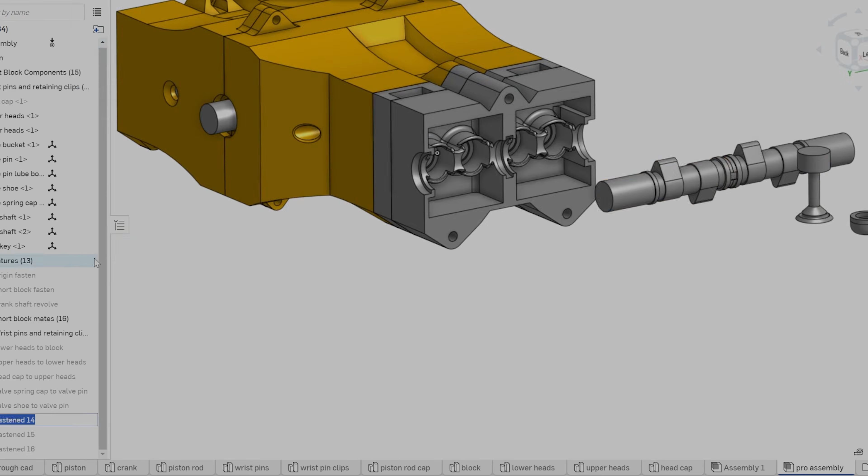Recently, I've been working on a 3D printed boxer engine. I designed it from the ground up in Onshape, taking inspiration from the famous Subaru boxer engine. This isn't a replica model by any means, it isn't a scaled version of an EJ or an FA engine, it's just how I went about making a boxer engine.

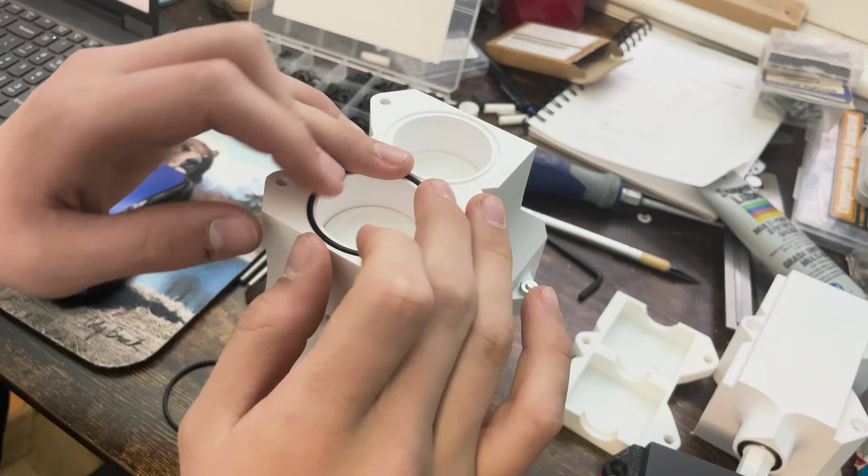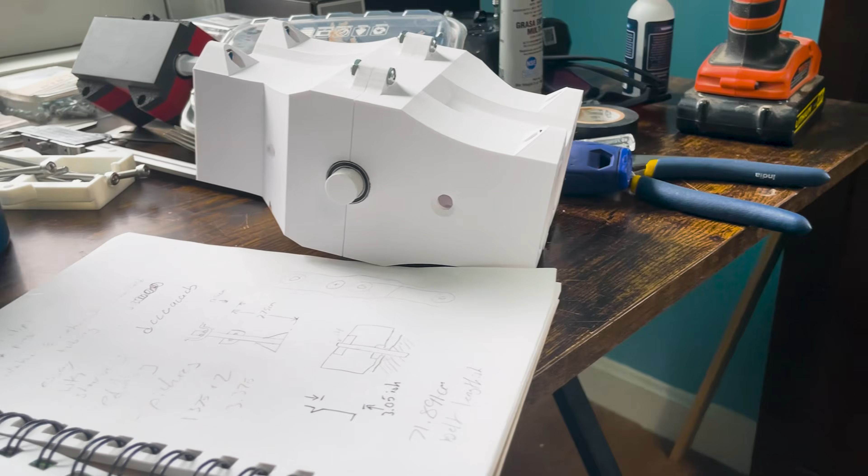My goals for this project are pretty optimistic. I want to try to make it run on compressed air. There are a whole lot of reasons why that's going to be insanely hard, which I'll get into. This is going to be the first of 2 videos I make on this engine, with this one being a lot about how I went about designing it and the assembly process.

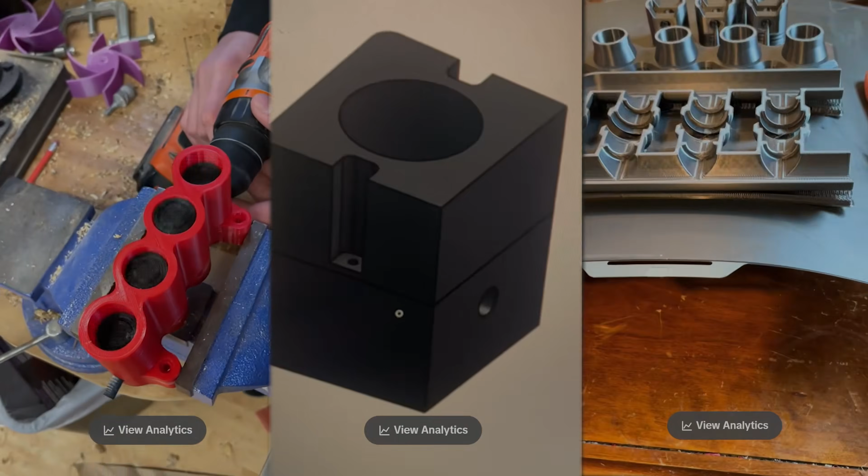I've attempted to make a bunch of engines in the past, a few inline 4s, some 1-cylinders, and a bunch of turbines if you count those. Since the last time I made one of these, my understanding of CAD has developed, and this was one of my motives for attempting this project. The other being that I just like cars and motors and stuff.

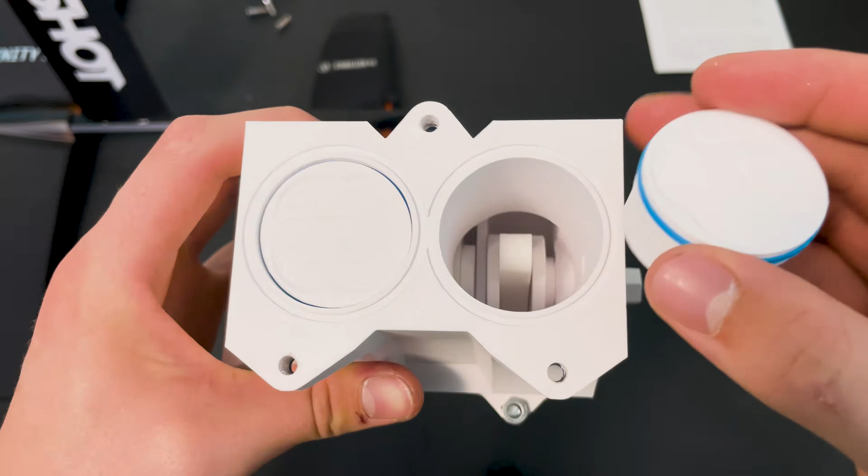Back to the challenges with making a 3D printed compressed air engine. First off is sealing. 3D printed parts are only so precise, and they themselves, due to the layers that they're manufactured in, are not at all airtight. So tolerances are going to have to be very precise and well designed surrounding the piston rings, the valves, and any other areas that experience pressure from the intake.

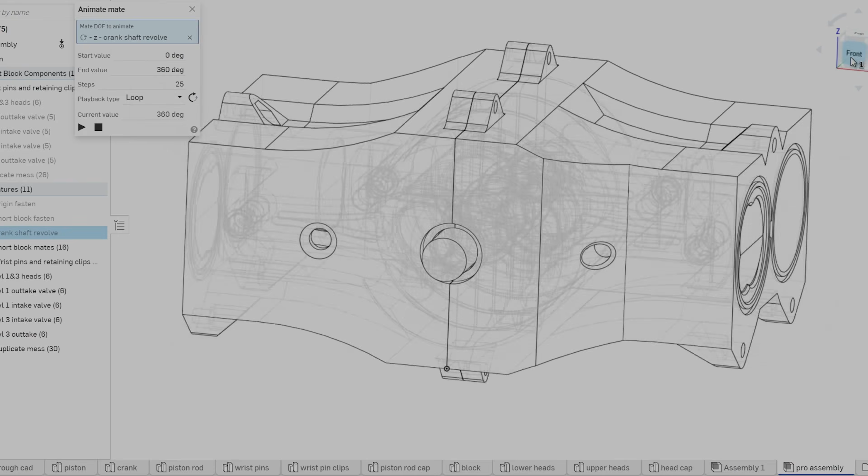Problem 2, because 3D printed parts are drastically more imprecise as they get smaller, for the sake of components like the valves and cams, I had to make the engine relatively large. The short block alone from side to side is 18 centimeters, and with the heads added to both sides, it's 30 centimeters. That said, it is not small.

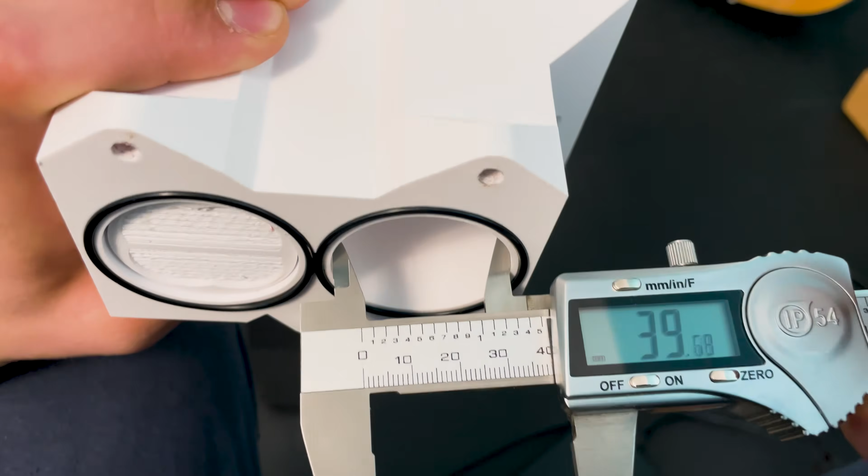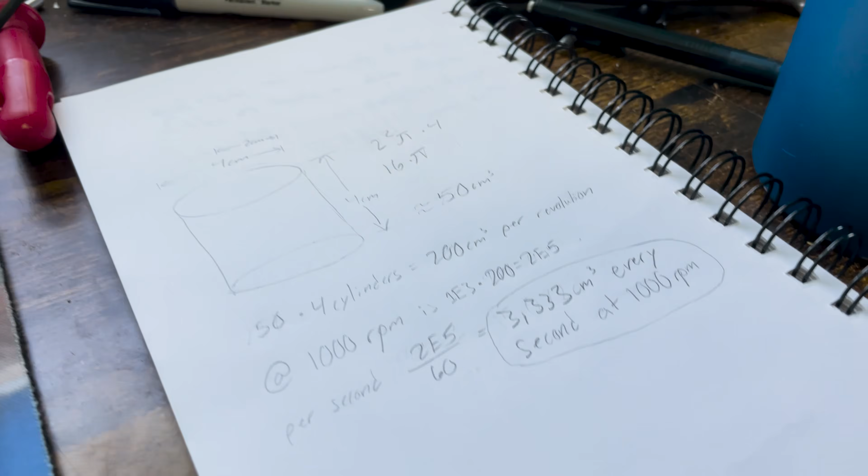This means that the displacement of the piston, and consequently the volume of pressurized air required for each stroke, is pretty significant too. I designed the stroke to be proportional to the diameter of the piston head, meaning that the piston is 4 centimeters across, and the distance the piston travels from top dead center to bottom dead center is also 4 centimeters. All this to say that our intake source not only needs to make pressure, but also shove a big quantity of air into this thing.

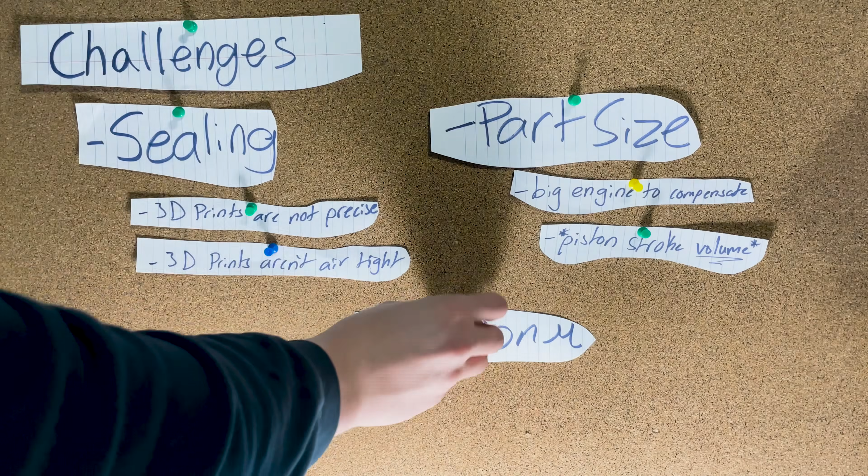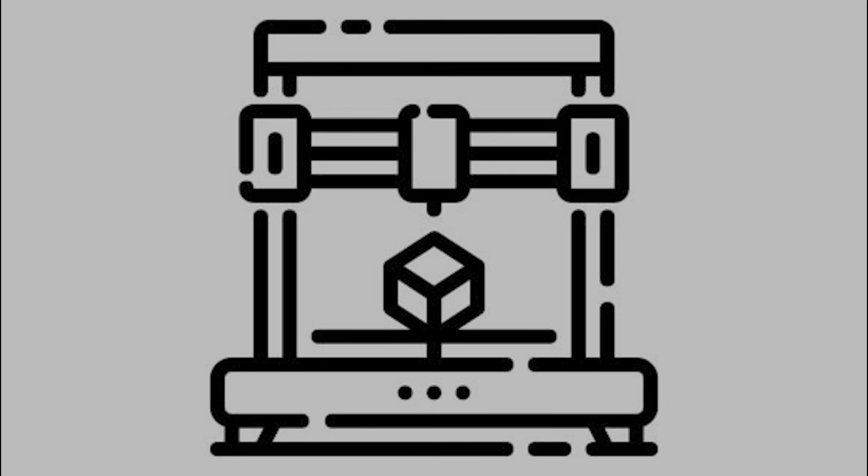Issue number 3, plastic is not metal. Plastic rubs, makes heat, fuses together, seizes up, very malleable and prone to warping or cracking, the list goes on. Well, then why don't you just use metal? Well, first of all, I don't have money. Second of all, I don't have a CNC. I have a printer, so I've convinced myself that this is part of the challenge, okay? There are a fair few other issues, but these are the big ones. Anyways, all that said, I'll start by explaining how this project began.

I started out with a cube in Onshape, just trying to figure out the rough dimensions of this engine before I started crafting up the main file. After Lord knows how many hours working on the short block, we've got this.

Surrounding the 4 centimeter cylinders on top of the block, there's space for some large O-rings to help with that sealing issue where it mates to the heads.

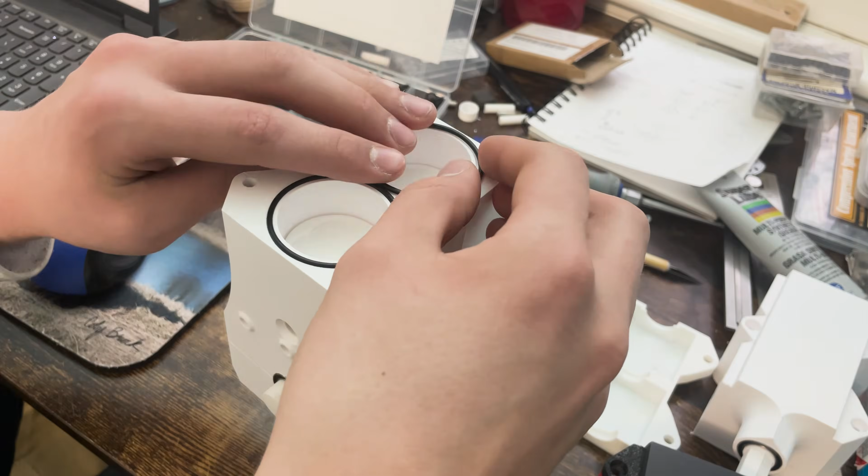I landed on using some chunky M5 bolts with nylon lock nuts to hold the heads to the block, which attaches here. To hold the two halves of the short block together, there are these tabs for some bolts.

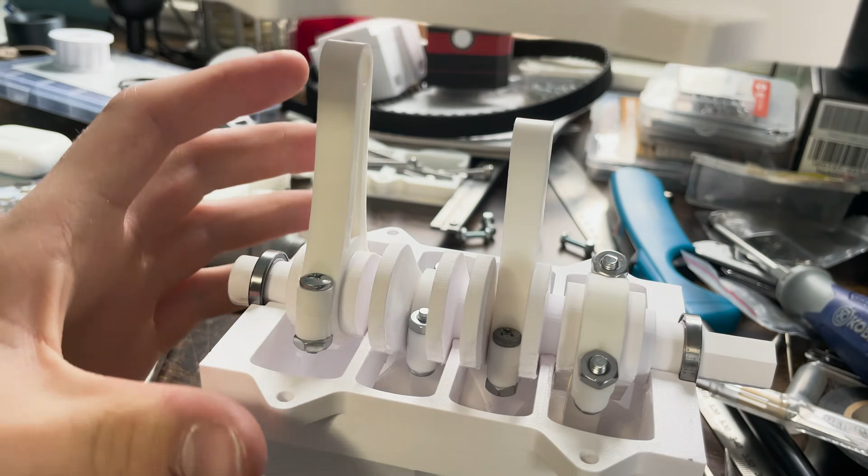The crankshaft sits in the middle, of course, and I made space for some massive 21mm bearings that I stole off of the RC car.

There are these supporting structures here with a slight indent, except for the very edge, to minimize the surface area rubbing against the crankshaft.

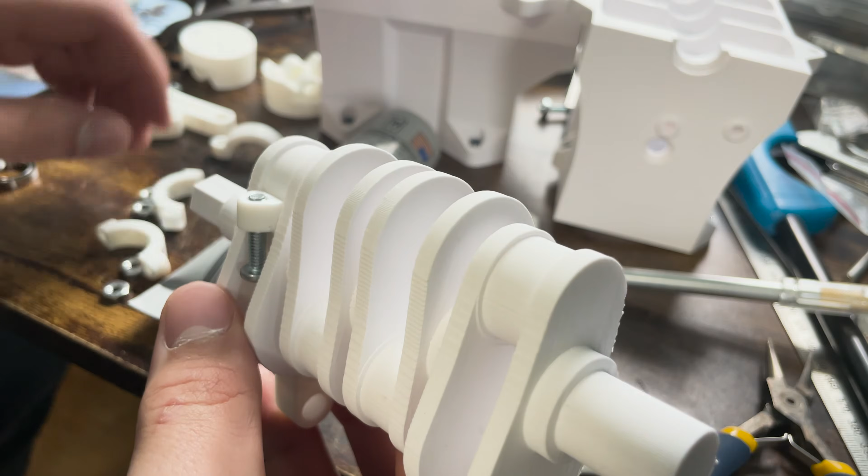Moving to the crank quickly, similarly I put little indents on the counterweights to minimize the surface area of the rubbing parts, and here is a hexagonal keyed shaft on the end for the timing belt.

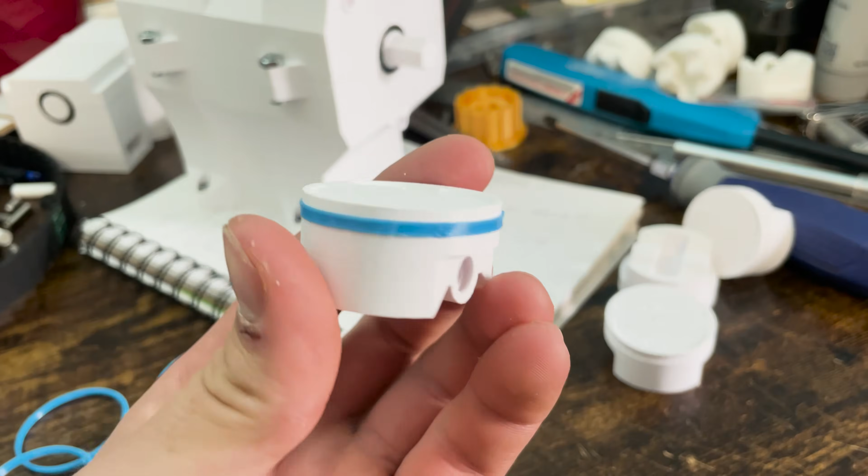The piston is also pretty simple. There's space for a piston ring, a wrist pin, and a retaining clip, and I put these fancy little extrusions on top like you see on F1 pistons. In reality, they do nothing, and in fact they just aggravate me when I have to take the supports off, but they look cool, so whatever.

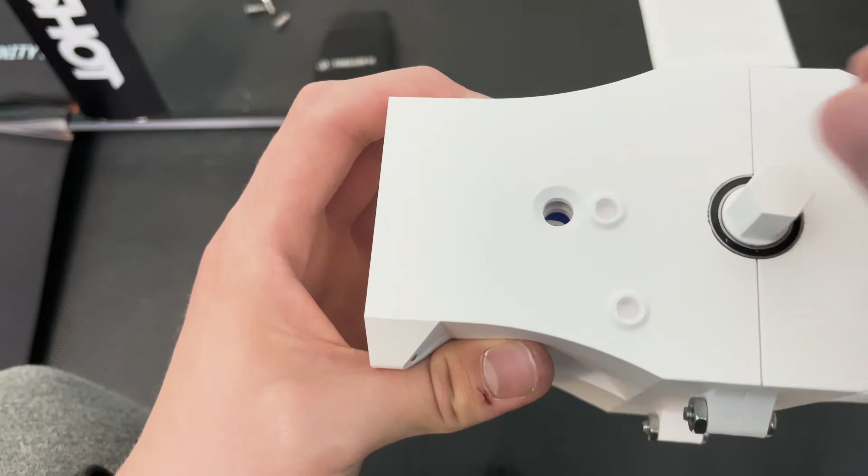I had no reason to factor this into the design since they're hidden inside the engine anyway, so like, why did I... Piston rods, rod caps, retaining clips, wrist pins.

Okay, moving to the heads. First up here is the lower head. This bit has channels for the air to flow for intake and exhaust gases, and on the bottom has a little indent for the valve shoe.

Next up is the upper heads. This whole assembly was probably the hardest bit to design. We've got space for the springs, push rods, the valve buckets, the O-rings, the camshafts, and the bearings.

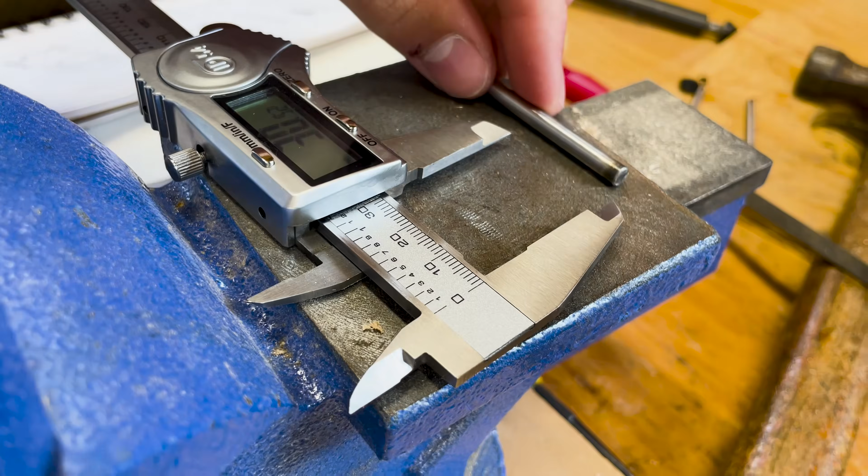The valve pins are made of 5mm stainless rods, each of which are hand cut and filed. Sealing O-rings are put into the upper head and the boot underneath it.

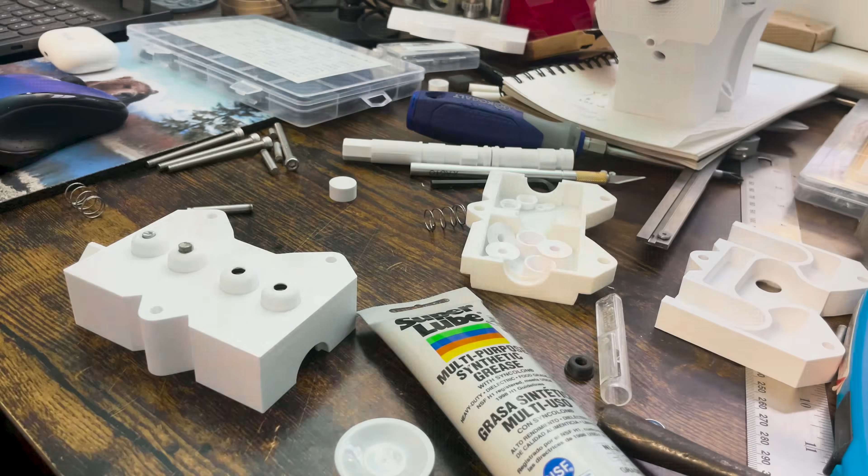Lube is packed in here for nice frictionless action, the shoe is hammered to the bottom, and the springs are then retained down with a clip and the bucket is placed over top. In reality, this took a stupid amount of time to design, iterate, and assemble, and it's still not nearly perfect.

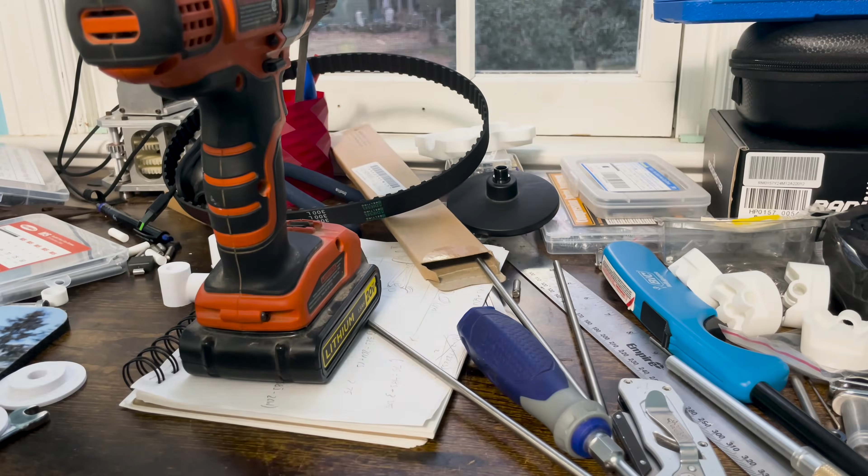Moving on to the timing bits, I bought a timing belt that's typically used for tractors or something. I made some pulleys with that same hexagonal key from earlier, then put some passive pulleys on the short block to offset the belt for more contact on the crank pulley.

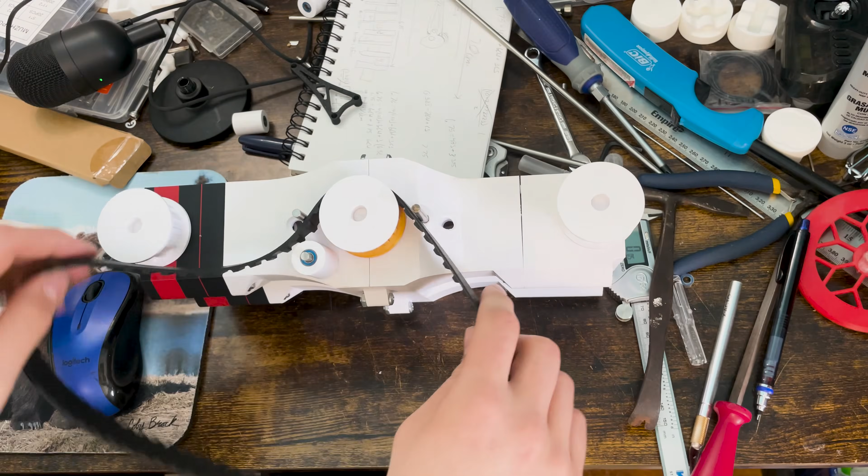I still need to work out a tensioner, but that shouldn't be too hard, right? And that's it-ish. We're roughly caught up to where I am now.

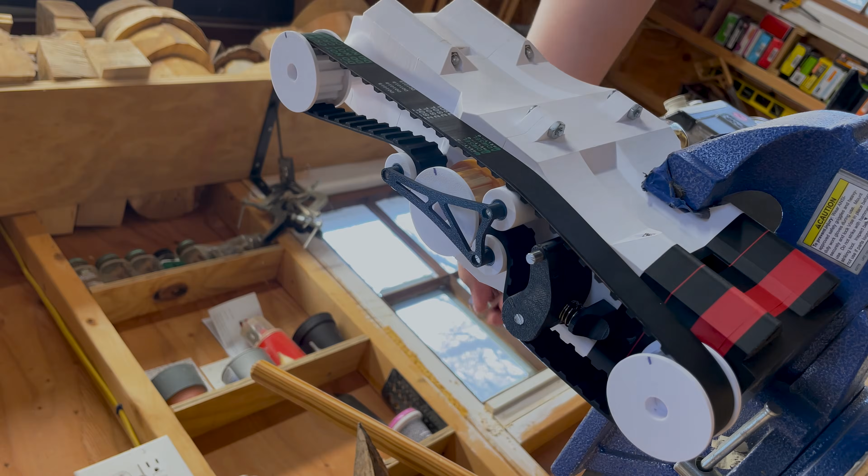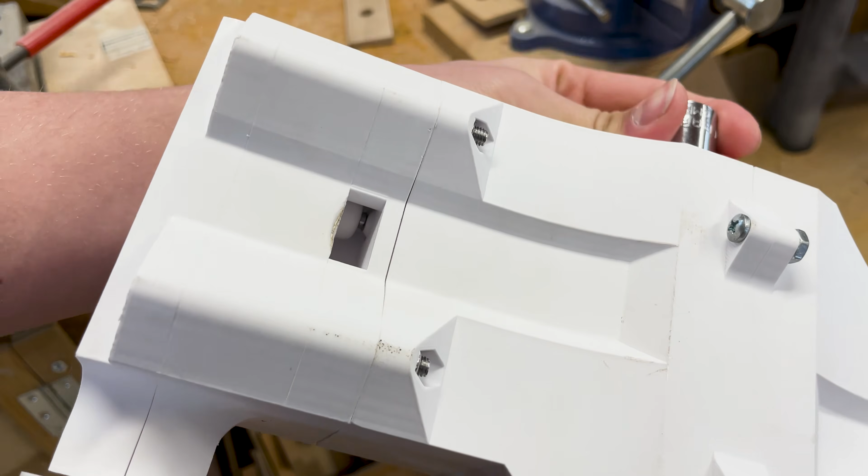I'm pretty thrilled with how this thing turned out. There's a good amount of things that I'm going to change for the next version. The tensioner that I made was sort of a last minute design, so it doesn't work the best, but for demonstration purposes, it gets the job done.

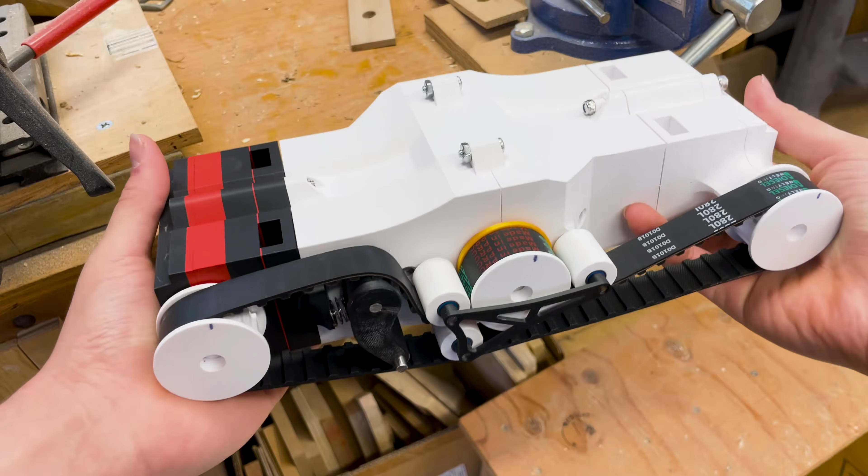With the revised cam profile and the lubricated valves, the heads aren't contributing very much rotational friction at all to the timing system. The majority of the friction is coming from the piston rings. This is another thing I'm going to have to seriously revise if this thing ever has any hope of running under its own power.

Speaking of which, the contenders for an air supply right now are a shop vac set on reverse or a 3D printed compressor. From the brief research I've done about 3D printed compressors, they don't work amazingly, but I'd be willing to give it a go.